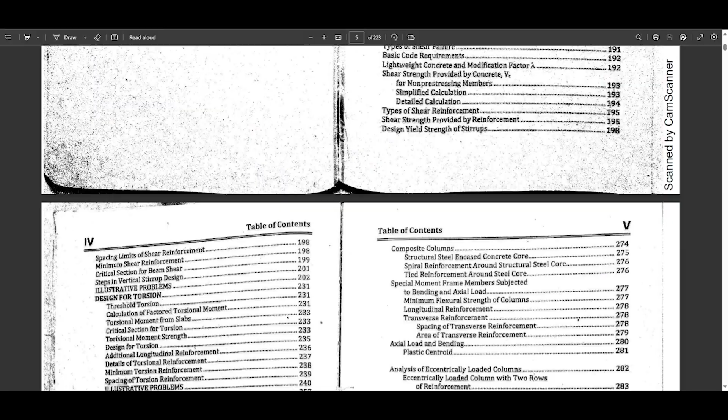Okay, good, so let's read it one by one. So, in the solution process for designing a singly reinforced concrete beam, please refer to our book. This is a simple span - very easy - a simple span beam loaded as shown. Given here is FC prime, that is actually the compressive strength of concrete, and the yield strength is 415 megapascal.

That is the yield strength of the metal. As I said, in our analysis, let's assume first that the steel yields - that's why usually what we use for the strength of the material, the tensile strength, is FY.

Kaya last time I discussed to you the grading system, di ba? Pag FY, this is grade 60 by the way. This is grade 60 kasi 415 is equivalent to 60 KSI, more or less, okay? And then there is steel cover of 60 millimeter.

So basically yung analysis, okay, of finding the dead load and giving the dead load and the live load, gagawa tayo muna ng tinatawag na procedure or steps katulad ng ginagawa natin sa steel design. Okay so the first step, pakibasa nyo nga, ikaw na nga.

Russell Allen, meron ka bang, iho? Do you have the DIT Gillesania's book? Meron kang DIT Gillesania's book? Russell? Hello?

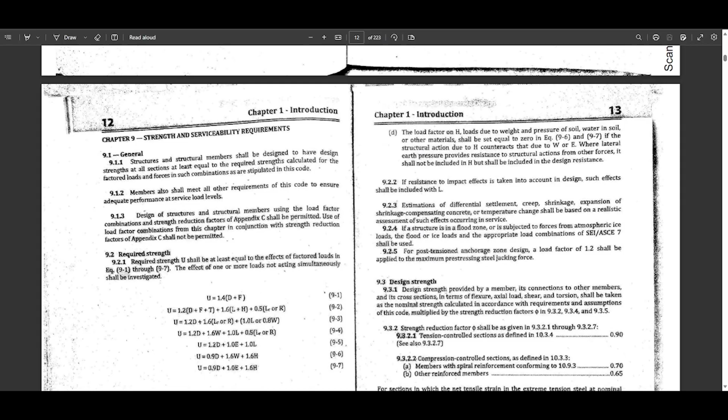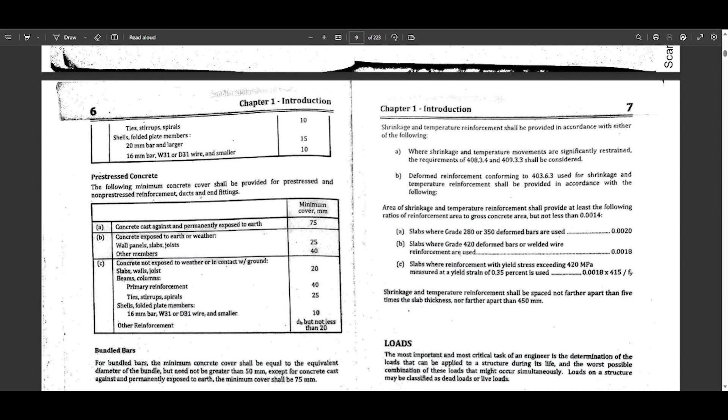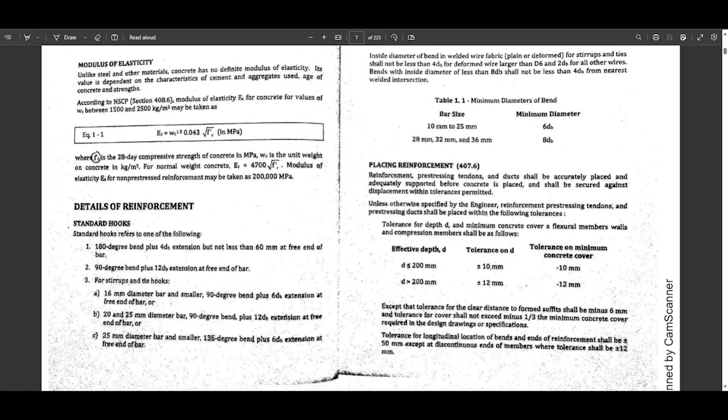Paki-check nyo nga, hanapin nyo. Have you seen, Russell? Not yet, sir. Okay, hanapin nyo, nandyan yan. Analytical steps for singly reinforced concrete beam. Sino nakahanap na? Para mabilis tayo. Hello? Sino nakahanap? Did you find it? Tingnan nyo dyan, sa initial page, in chapter 1 or 2 yata, singly reinforced concrete beam. Hello? Nakita na? By DIT Gillesania? Wala pa rin? Di pa rin nakahanap? O sige, mamaya hanapin nyo, ha?

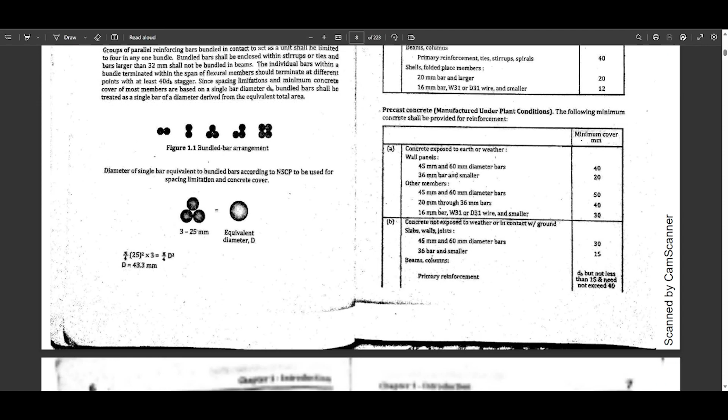Sundan nyo, ha? Okay, hanapin nyo, nandyan yan, it's all found then. So yung first step is load analysis, identifying the load. Ito, ibig sabihin, identified, ang dead load and live load.

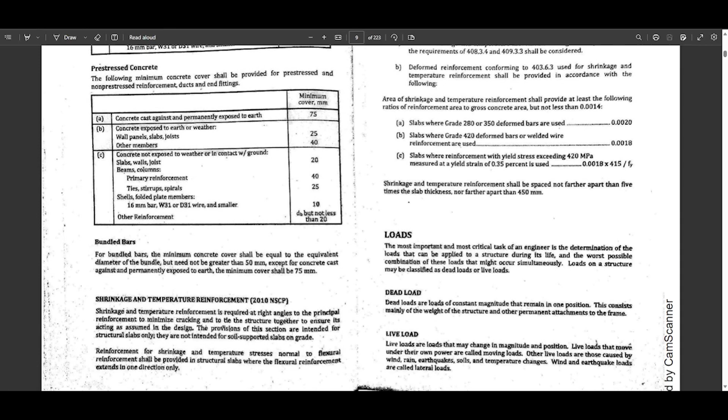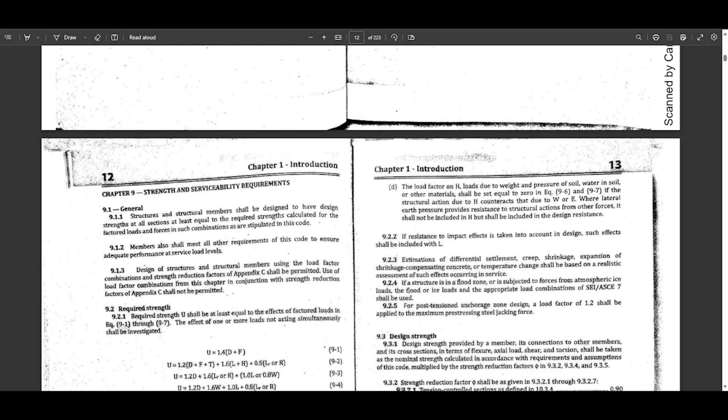Usually, lahat kasi ng klase ng dead load materials, like ano ba mga dead load materials? Floor tiles, yan. Ceiling, okay, partition, okay, they are all dead loads, including the weight of the beam and the slab. So everything here, makikita nyo yan doon sa NSCP. Nandun lahat yan in kilopascal, no? They are found in the NSCP, lahat yan in kilopascal. Ano yung ibig sabihin ng kilopascal?

That is kilonewton per meter squared, that is load per area. In general, load per area yun, ha? Hindi yan uniform load, ha? Okay? Pero ang ginagawa natin, tinatransfer natin from the floor to the beam itself para maging uniform load yan. Actually, there are formulas that we can use for us to consider load transfer.

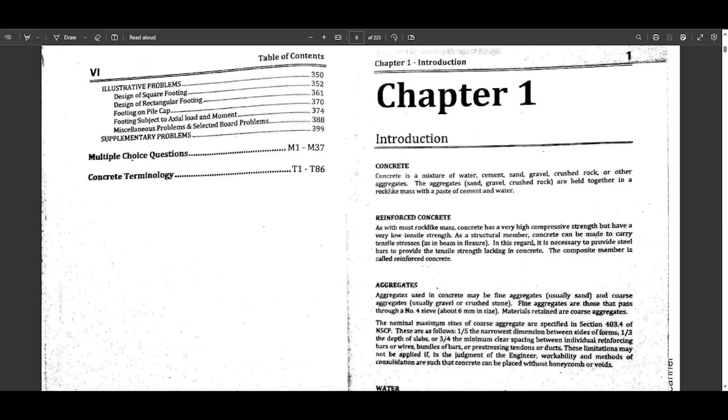And also for the live load. Sa live load naman, pag residential or type of occupancy, okay, tingnan nyo rin yung NSCP nyo, yung loading, nandun din siya. Usually, the value for the residential is 1.9, okay, or kaya 2 kilopascal. Pag commercial, school building, hospital, meron din sila correspondingly, mas mataas definitely, no? It can be more than 4 kilopascal. Ayun, hanapin nyo na lang ulit sa NSCP, ha?

So please refer to all of this matter sa NSCP when it comes to load. So therefore, dito naman sa problem natin, identified na yung load. Meron na siyang superimposed dead load na 20 kilonewton per meter at saka live load. So wala nang problema, nandito na siya, naka-impose na sa beam. Identified na. So that is the first step, identifying the load.

Okay, so dead load. Sulat ko na lang dito, ha. Huwag nyo lang copyan, I will send it to you later on, ha. So dead load is 20, and then the live load is 10. Identifying the load, meron na.

So these are called superimposed dead load. Hindi pa kasama rito ng weight ng beam. So sabi ko nga sa inyo last time in our steel and timber, palagi natin isasama yung structural components sa dead load, ayan, yung weight niya, yung bigat niya. Okay, in the case of beam, wala, hinahanap natin yan. And ang priority natin, class, is to design consequently the beam at the middle span where maximum moment will occur, and i-design natin.

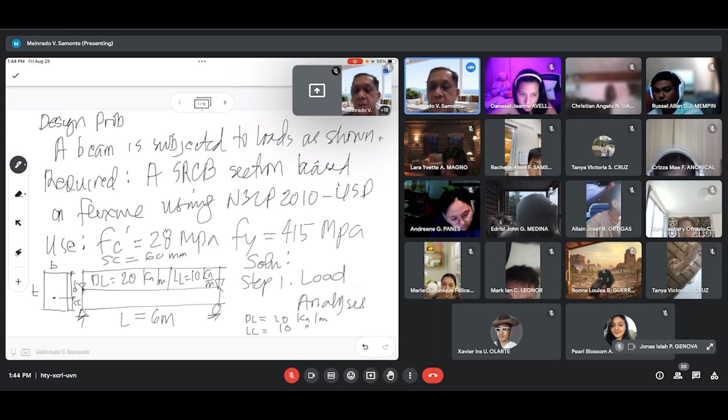Dito sa problem, it is given as 60 mm yung steel cover, class. Ibig sabihin, yan yung distance naman from the bottom fiber, okay, or extreme fiber, to the centroid sa gitna, ha? Okay, there you are.

So yun ang first priority natin, yung section. Section yun, this is the section of SRCB, yan, section of SRCB. Okay, yan ang section ang hahanapin natin, ha? Take note, ha? Okay, yun ang first priority natin pag singly reinforced. Pag nag-design tayo, yung section, hanapin mo rin yung width, tapos hanapin mo yung thickness, and including the effective depth. Una muna, basically, effective depth muna, yung D. Okay? So yun ang first priority natin, our objective in the design. Okay, so next.

Okay, also we designed the reinforcement. Yung bakal, kailangan yan. Pag walang bakal, ilalim ng bottom fiber, below the bottom fiber is under tension of the neutral axis. Technically, yung neutral axis niya mababa, so magpe-fail siya dahil kailangan natin ng reinforcement sa ilalim ng particular portion ng beam.

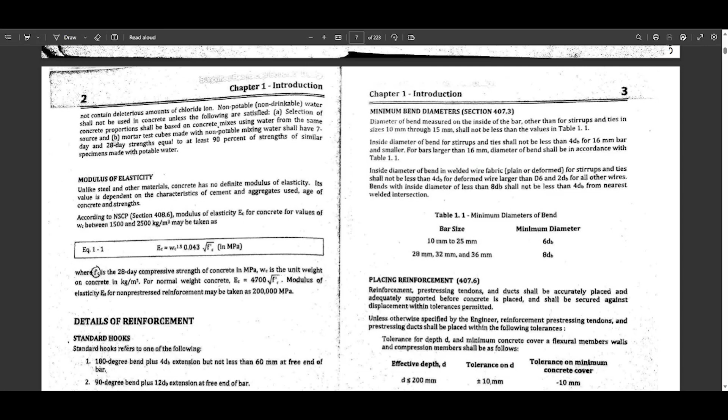Sir, ano po rin yung SC? Steel cover. Lahat ng parameters, define yan, nandiyan sa book ni DIT Gillesania, pati yung derivation, pag-aralan niyo na lang. Nandyan lahat yan, everything is there, pati yung formula for bending moment, yung ultimate capacity.

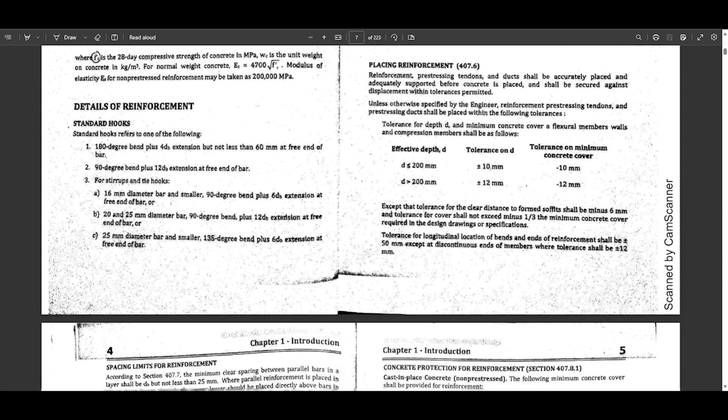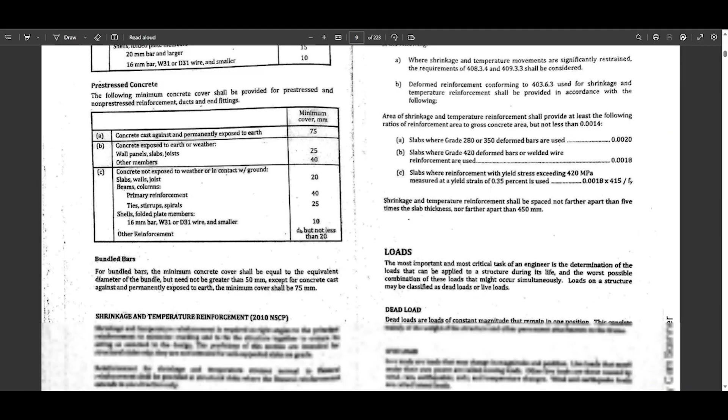Kadalasan ang hanapin natin dito, because flexural strength, ibig sabihin related to sa moment, kasi magkakaroon to ng bending moment, above tension at saka compression. Kaya importante, you study yung derivation kasi mahaba-haba yun kaya hindi ko na i-discuss. Pag-aralan niyo na lang, nandiyan yung derivation and all the parameters defined ni DIT Gillesania. But kung kailangan, itanong niyo sa akin later on, how this particular formula was determined.

Okay, so marami yan, ha? Mamaya didiscuss natin yan isa-isa. Okay, next, step 2, kailangan mag-assume tayo ng weight ng beam. Sino nakahanap na yung analytical step? Ikaw, Panes, baka nahanap mo na ano yung step 2 dyan? I know that is the weight of the beam.

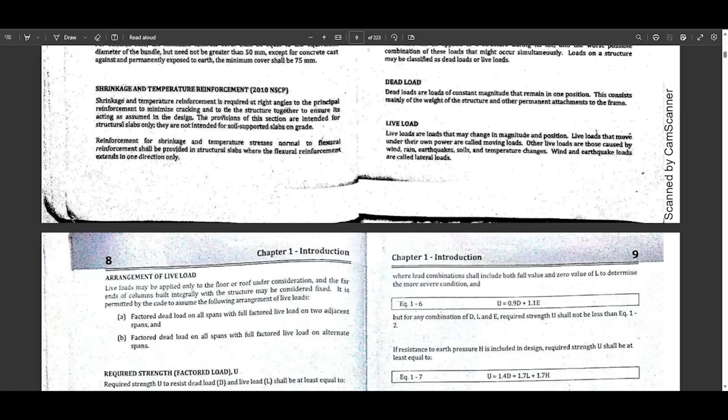Panes, paki-sabi mo nga, anong sabi niya? Sige, read. Approximate the weight of beam dead load as follows. Tatlo yan eh, tatlo yung weight ng beam as yung assumption: small beams, medium size beams, and then large size beams.

Anong inassume natin? So pwede ka rin ano yung value pag small, medium, at saka large beam. Come on, dali, go ahead. Pag small, what is the assumed weight of beam? 2 kilonewton meter po. Okay, 2 kilonewton, yan okay. Next ano pa? Pag medium, 3.5. Inassume ko 3.5, ha? Inassume ko muna siya na 3.5, okay? Kasi bakit 3.5? Kasi medyo mahaba-haba ng konti, okay.

Ideally, between 0 to 3 meters, pwede siyang small beam. 4 meters to about 6 meters, pwede siyang medium, kasi malaki na yung moment niya. And then 6 to 10 meters, large beam. More or less, yun ang pwede natin gawing basihan, or including the load, perhaps, sometimes. Kasi pag malaki din yung load, it will produce a large moment, no?

So that is the basis kaya nagbigay ng suggested beam si DIT Gillesania, to assume the weight accordingly. Kasi wala pa tayong weight, wala pang section. You cannot determine the actual weight unless they have the section. Maliwanag yun, ha? So inassume muna natin na medium size beam, so 3.5.

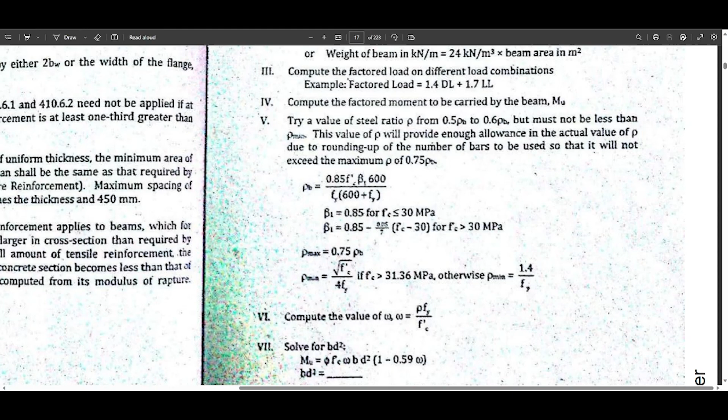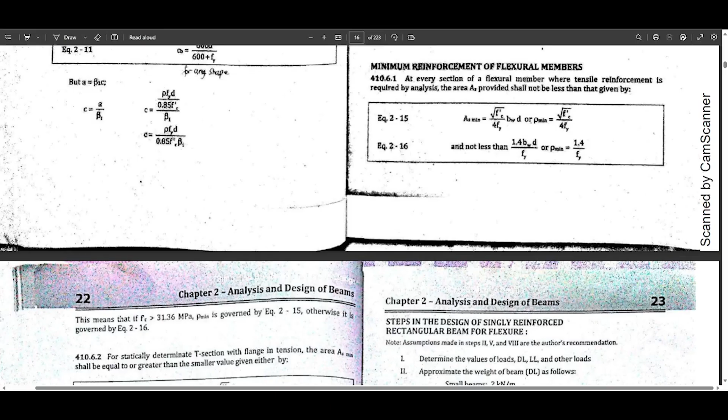Nag-re-reconnect ako, ha. I was lost with regards to my Jamboard. Biglang interruption, eh. Okay? So far, ganun lang naman idea niyan. Sandali lang, ha. Magsishare lang ako. When I come back, I will continue the discussion. Sandali lang, ha. Nagre-reconnect pa ako. I'm still reconnecting with my Jamboard. At any rate, I hope you can follow with the discussion, okay. I'm trying to get my connection. Medyo mabagal, biglang bumagal.

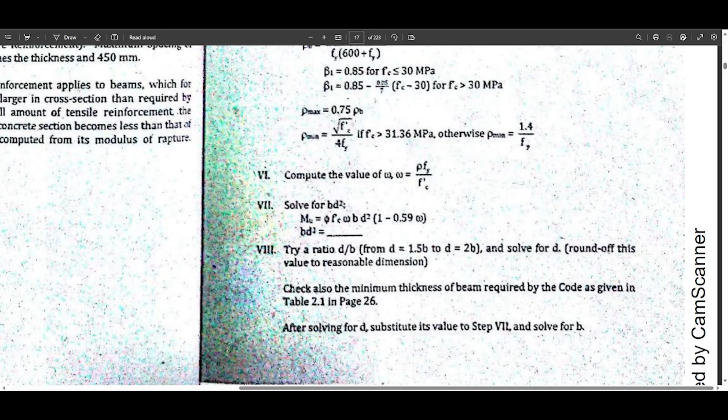Beta 1, okay, is a parameter in which it is equal to 0.85 for all f'c less than or equal to 30 megapascal. Ang value natin kasi rito sa given in the problem, ang f'c natin, yung compressive strength is 28. Kaya ang beta 1 dito must be equal to 0.85. Gamitin mong value 0.85. Beta 1 is equal to 0.85.

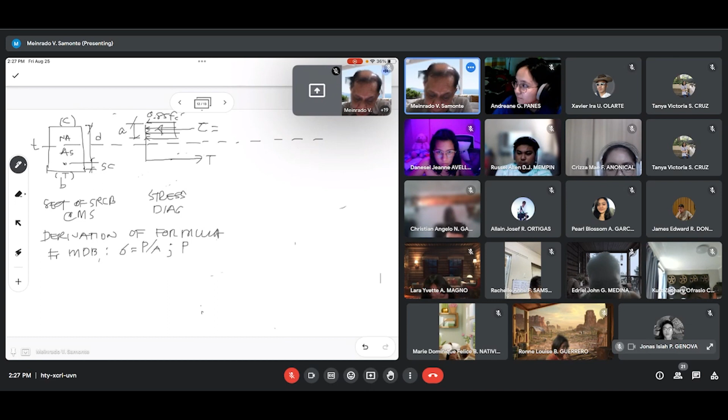Ngayon, in such a way, sinimplified pa niya. In terms of the force, it is also equal to the stress multiplied by the area. Simplification yun. Or cross multiplying the stress by the area will give you the force. Okay? So, bakit force? Kasi nga, we have two forces here, two resultant force, under compression and tension.

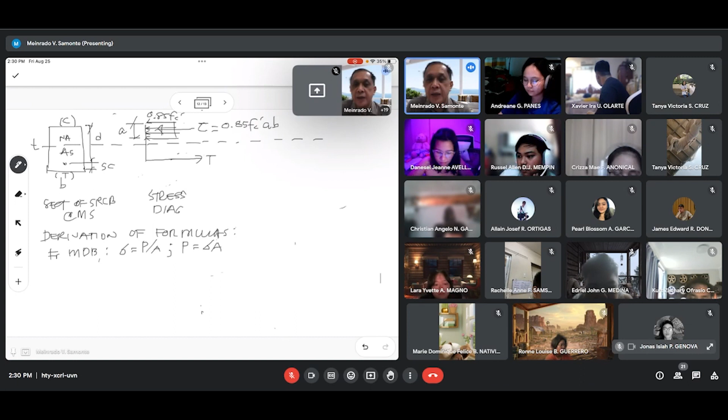It has yielded, meaning it has reached the yielding point. It has passed the proportional limit towards the ultimate strength. So the formula now, again using sigma, our sigma is Fs or Fy.

Let's use Fs for now. Okay, if you want, that is the actual tensile strength multiplied by the area, or Fs multiplied by the area. So there now exist two particular forces.

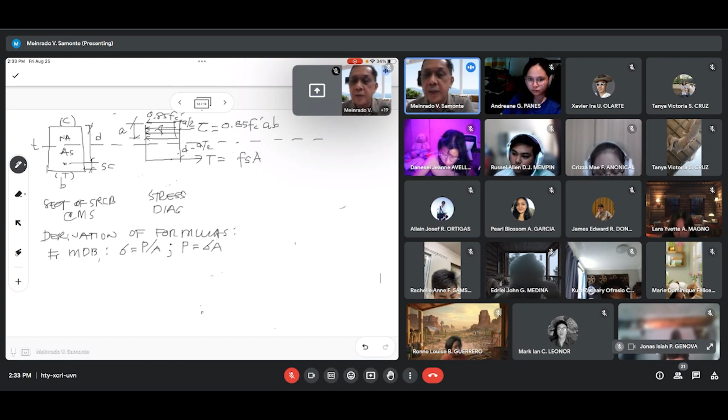So therefore, we've created these two couples. And technically, one of the failures of the beam, for flexure too, huh?

Flexural strength or flexure. This is the formula we're deriving. When it's flexure, it means this will consider bending moment, because flexure is bending. So this will have a moment here. That will now be your moment.

It will produce a certain moment. Let's call it Mn. So actually Mn later on is the nominal moment we used in LRFD. What is that moment? Actually that is the couple. We said in statics that a couple is the product of the force by the lever arm distance.

Very easy, okay? If you remember couple, C is equal to F multiplied by D. What is F? Either compression or tension, that is the force, either F, or either C or T. Depending, for example, if I take moment about T, we get the moment due to compression.

So what now is the moment due to compression? Let's place it, okay, based on statics now, from statics. Okay, so statics, from Singer, says couple is equal to the product of the force multiplied by the distance. That's the formula, okay, from statics, that's a couple.

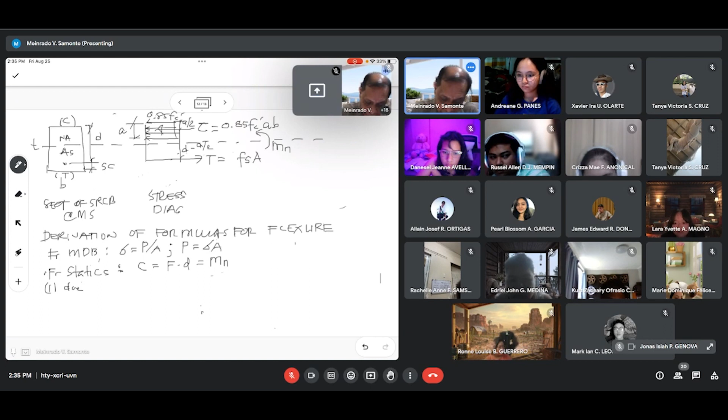At compression, due to compression. Significantly, if you take moment along the tension zone equal to 0, then the nominal moment due to compression shall be equal to the product of the force.

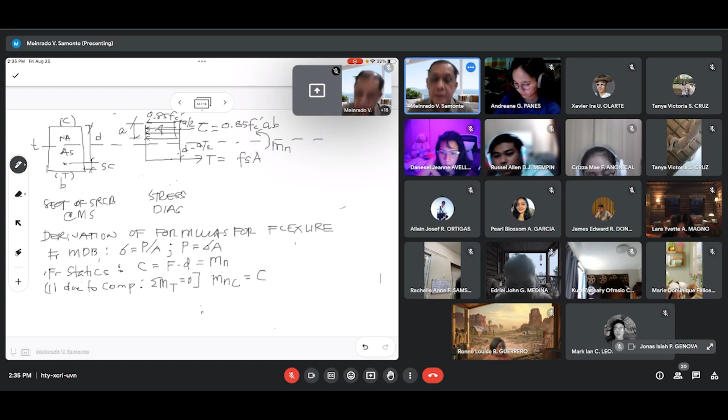What is your force? That is your force C, isn't it? This is statics, the compression force C. And then multiply it by the lever arm distance.

What is our lever arm distance? That will be the distance between the two forces, D minus A over 2. Okay, very easy, right?

Using statics by taking moment, you take moment at the bottom. There are two of them. You take moment at the bottom to compute the moment due to compression. So if you substitute C now, what is the value of C?

We can state that moment due to compression shall be equal to 0.85 FC prime, multiplied by AB, then multiplied by quantity D minus A over 2. This will now give us the first equation, equation 1-A.

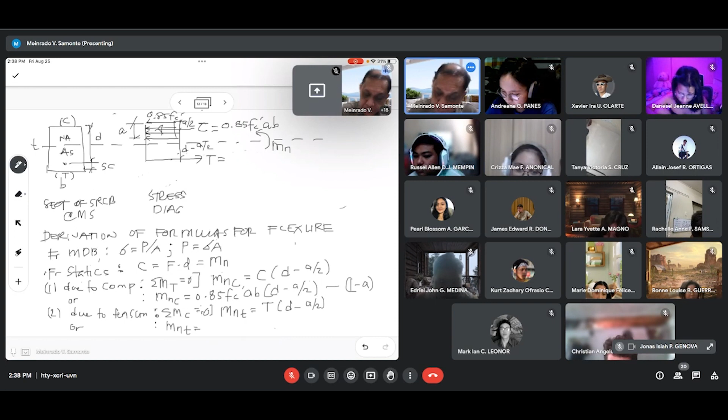Let's put AS first, since that usually comes first, though it doesn't matter which order. AS FS, then multiply it by quantity D minus A over 2. This will now be our equation 2-A.

Any questions? So that's the formula, very easy for us to determine the bending moment based on statics. That's the basic assumption.

Now, later I'll give you the formula on how to check whether steel yields or not, based on the strain diagram. So what is a strain diagram? Literally, we'll have a strain diagram here such that we have two particular strains. What is strain? That is elongation.

That is what we call elongation, in which there is elongation due to steel and elongation due to concrete. For the elongation of concrete, theoretically, that is 0.003, and then the distance, this is the distance I'm talking about, this is now your distance C from the neutral axis.

The remaining distance, at the point of zero strain, this one is taken as D minus C distance.

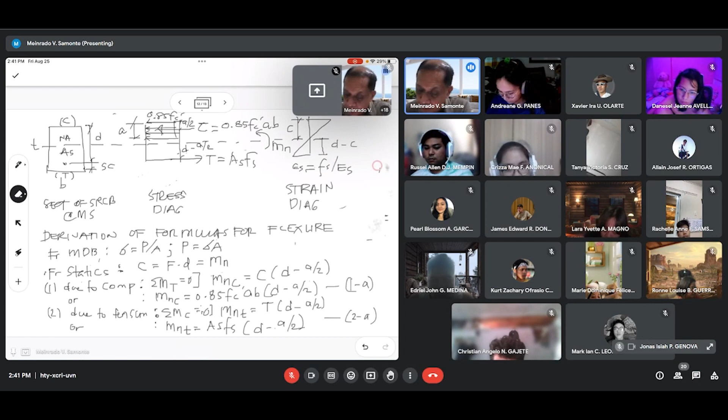Because the problem here is, if it doesn't yield and is less than Fy, use Fs. But if it yields, use Fy. This is called the strain diagram. At the top, the concrete, its strain is fixed at 0.003. Epsilon of C is 0.003.

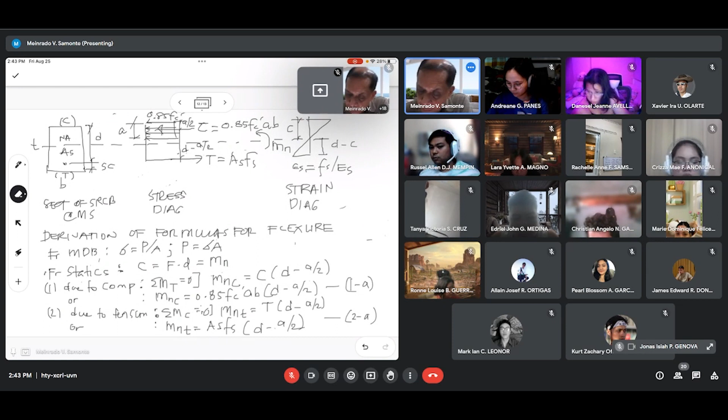Okay, basta yung nasa taas, epsilon of C yun, ha? That is epsilon of C. Masyado kasing na-usog doon and I cannot write down. So, epsilon of C to. This one is epsilon of C. We call this as the epsilon of C.

Sa concrete sa taas, under compression is concrete. Sa baba is steel, yung elongation niya. And the value given by the code, ACI code, is 0.003. Huwag niyo na akong tanungin bakit 0.003 yan. Okay, so na-modify pa itong mga formula nito.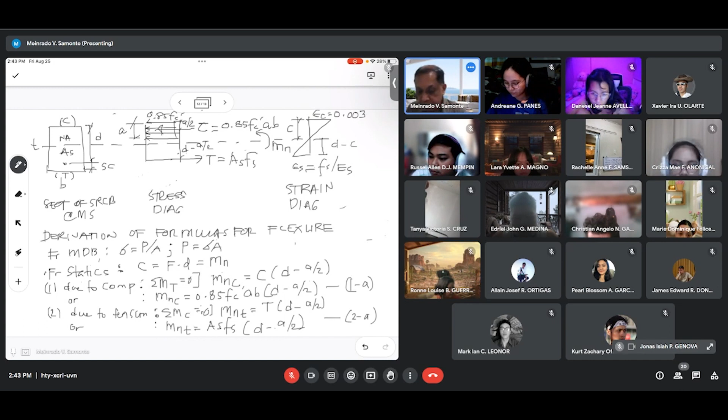So technically, from ultimate strength or MU capacity of the beam, moment capacity, ultimate moment capacity of the beam now, from LRFD and USD, ultimate moment capacity na. MU capacity, MU must be equal to phi of MN, where sa LRFD, MU is the ultimate moment capacity of the beam in kilonewton meter, while Mn is the nominal.

Magkaiba yun, class, nominal at saka ultimate. Nominal naman, Mn is the nominal moment capacity of the beam, of the non-pre-stress beam. Ang tawag nila dyan, non-pre-stress beam. Hindi ko na lang nilagay, tingnan niyo doon sa libro ni Gillesania. And phi is the reduction factor, which is equal to 0.9. Reduction factor for flexure or bending, and it is equal to 0.9.

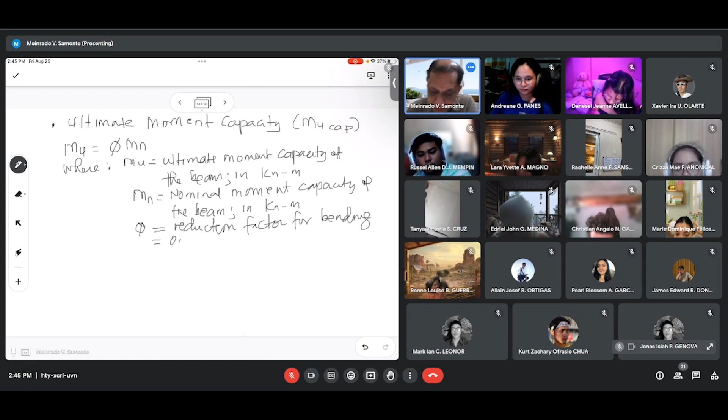Okay, pag alam mo si Mn, substitute mo lang yung phi, you can determine Mu. Okay, tawagin natin itong equation 2, this one will be a second equation. Now, mayroon pang modified formula. Maraming formula si A class, hindi ko na i-discuss, mahaba eh. Marami yan, 4 yan, yung formula na binigay ni NSCP.

Modified formulas, okay. For MU, MNC, nominal moment capacity under compression. Ito yung modified formula, isa sa mga formula noon kanina binanggit ko, since yung A kasi, there are so many formulas. 4 yung formula ni A. Tingnan niyo na lang mamaya yung mga formula niya, derived from statics and derived from basic formula.

Ang unang formula given, A is equal to beta 1 of C. Ito yung first formula for A, tandaan niyo yan. Sinabi ko na kanina, okay, pag if FC prime is less than or equal to 30, sabi natin, use beta 1 is equal to 0.85. Ito yung gamitin, nalagpasan na.

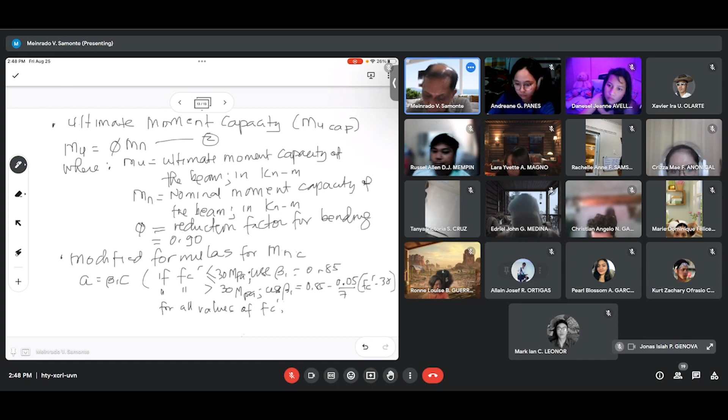Likewise, okay, if Fc prime, for all values of Fc prime, ang sabi niya, huwag ka rin daw bababa ng beta 1 must be greater than and equal to 0.65. Ayun, huwag ka rin bababa ng 0.65. Okay, there you are. So yan ang mga first formula yan for A.

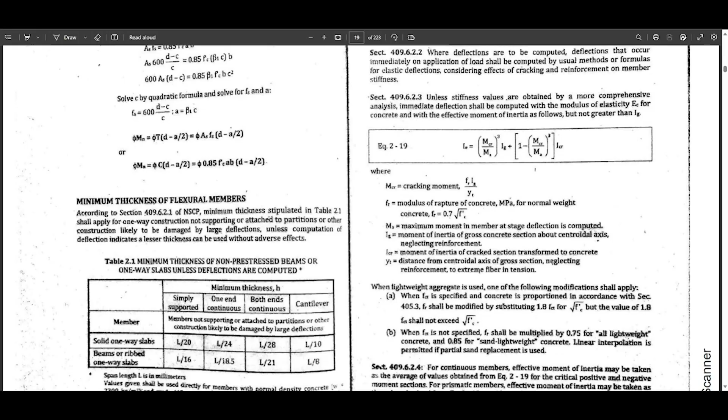Isa sa mga formula to, modified formulas for stress block parameter A. Marami pa siya, dalawa pa yung binigay niya. Pakitingnan na lang. Yung isa naman, second formula niya, if I sum up forces along the x equal to 0, T is equal to C, where that is AS, Fy shall be equal to 0.85 of Fc prime of AB.

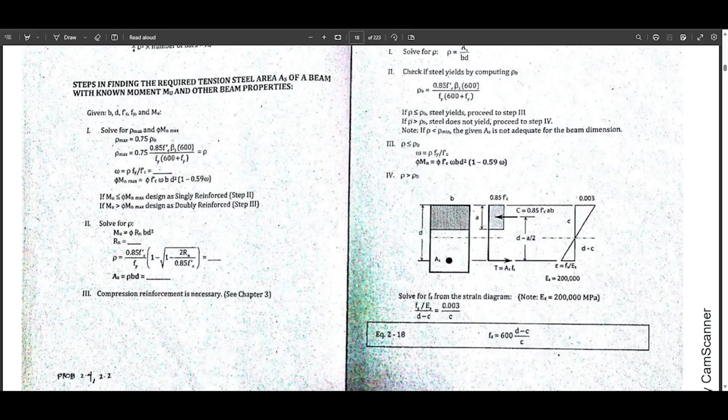Sabi niya, rho is equal to AS over BD, or AS is equal to rho BD. And then if I substitute natin ngayon to sa equation 2, so substitute AS in equation 2. So pag sinubstitute mo yan, okay, therefore A is equal to rho BD Fy over 0.85 of Fc prime of B. Na pag sinimplify mo to, B will be cancelled out.

Yan. Maka-cancel out si B, okay? So what remains now is that A, third formula, is equal to rho Fy d all over 0.85 of Fc prime. Yan. Another formula. Third formula yan. And finally, yung fourth formula niya, since omega, yung kanina ginamit natin, is equal to rho Fy over Fc prime to determine rho, okay?

Then, or perhaps, rho is equal to omega Fc prime over Fy. So, yun yung simplified naman in terms of rho, okay? Para ma-eliminate natin si rho, technically in the formula. Then, substitute again. Substitute rho in equation 3. Hence, A now will be equal to omega Fc prime over Fy, multiplied by d all over 0.85 of Fc prime.

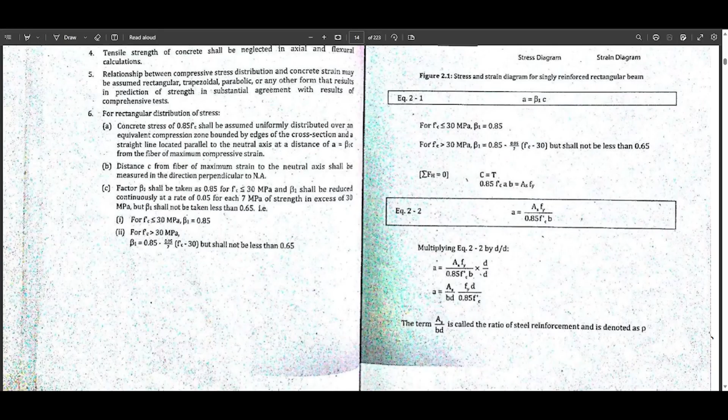Okay? So these are some of the helpful formulas that we can use to determine the stress block parameter, because this one is an unknown factor, class. Unknown parameter yan that we need to determine one by one. So apat sila. This is the first one. Okay, question? So pag alam mo na A is equal to omega d over 0.85, what is the modified formula? Ito yung modified formula niya ngayon for finding your Mu.

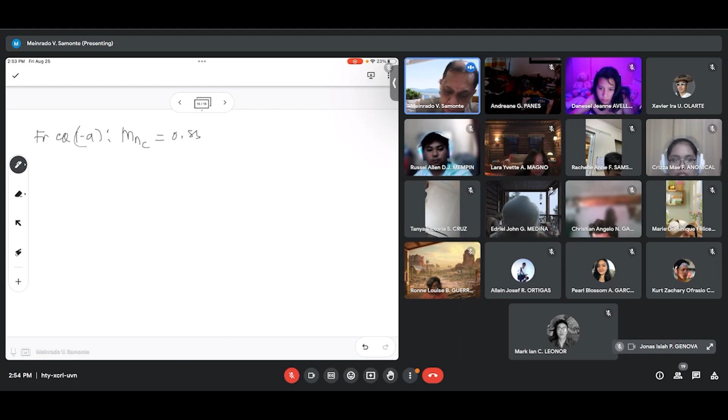Okay, so since Mn under compression ngayon, ang modified formula will be, from equation 1-A, yung unang derived formula for nominal moment capacity, Mnc is equal to 0.85 of Fc prime of a, b, multiplied by quantity d minus a over 2. Ayun. Di ba? Ito yung formula kanina.

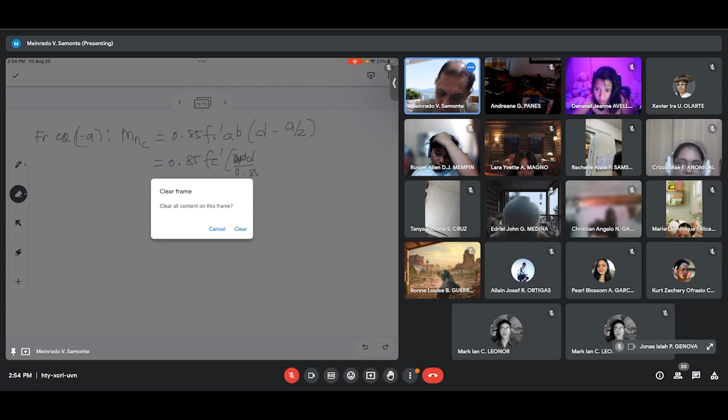Yung moment. So, pag ni-replace ko ngayon ng a in terms of omega, that will now be 0.85 of Fc prime of omega d all over 0.85. Sino yun? Pumapasok. So we have omega d over 0.85, and then multiply it by b, and then multiply it by quantity d minus a over 2, which is omega d over 0.85 divided by 2.

So technically, magka-cancel out ngayon yung 0.85. Itong dito naman, if you try to factor out yung d and simplify it, therefore, Mnc, the nominal moment capacity under compression, will be Fc prime b d squared omega multiplied by quantity 1 minus 0.59 omega. This is now the alternative formula for the moment capacity under compression. Tawagin natin to equation 1-A prime. Either that one or this one will do. Maliwanag? Ganun lang kadali.

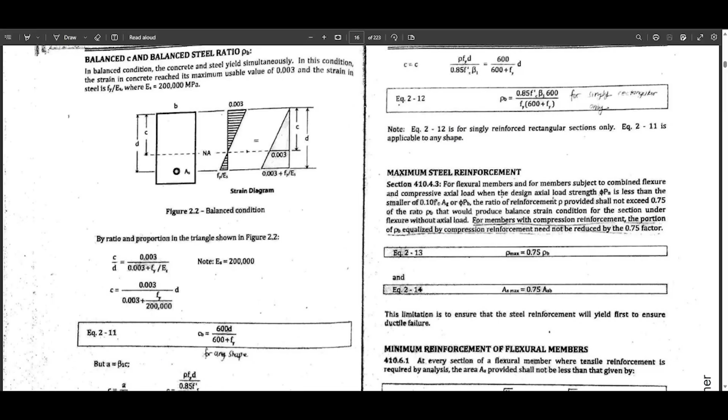Solve for B. Tama po ba? BD squared. Okay, solve for BD squared. Thank you, tama. Solve for BD squared. How do we solve for BD squared? Yan. Kanina, yun nga, dinerive ko na kanina yung formula for omega. Kasi pag hindi ko dinerive yun, hindi nyo malalaman yung formula na yun, no? The alternative formula based from statics.

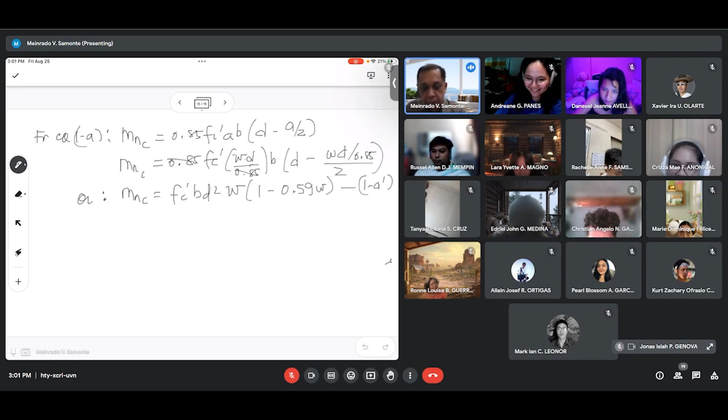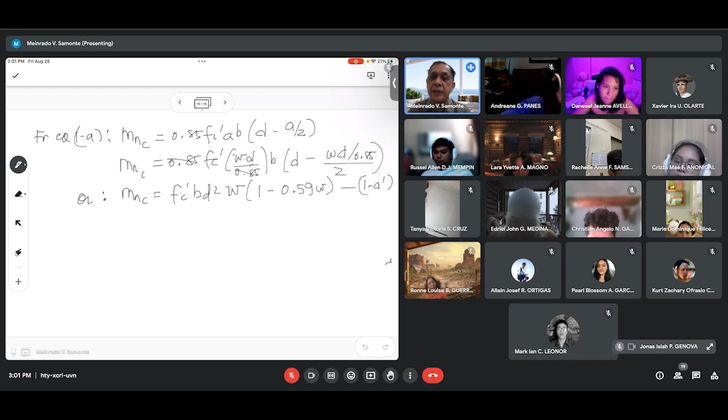Okay? So, how can we design now the section? So, ito lang gamitin natin. In-apply natin yung principle na under this condition, nagdi-design tayo, gamitin mo muna yung MU max. Kasi yung MU max is the maximum supplied moment. Okay? Magkaiba yan sa MU capacity. Wala pa tayong MU capacity dahil wala pa naman tayong section. So technically, kaya nga natin yung design, gamitin mo muna yung supplied moment, yung maximum. Okay? Therefore, pag ginamit natin yung MU max in the design, ayan ha.

Okay. Ayan. So, ginamit natin that MU capacity is phi MN. Don't forget yung phi, ha? Pag MU yung pinag-uusapan, ha? Kailangan may reduction factor, 0.9 yun. And then, it must be greater than or equal daw to MU max for design purposes. In investigation, to make sure na safe siya. Pag nag-investigate naman tayo, dapat yung MU capacity, huwag kang bababa ng MU max due to supplied load. Okay?

Ngayon, yung MU max kanina, that is due to supply, na-compute naman natin, 198.9. Tama? Okay. I hope that is correct, no? And then 10 to the 6. Bakit 10 to the 6? Kasi kilonewton meter yan. So conversion factor para maging newton millimeter, you have to multiply it by 1 million. Kasi 1 kilonewton is 1,000 newton, then 1 meter is 1,000 millimeter. Kaya 10 to the 6. You just add the 2. Okay? And it must be equal lang to phi.

O anong phi natin? 0.9. And then FC prime is 28. Tapos yung unknown variable na BD squared. Okay? Multiplied by omega 0.2134 by quantity 1 minus 0.59 of 0.2134. So the resulting value, again, ito yung ginamit natin ulit sa steel, in our previous steel design. Sabi ko, when you round up numbers, unit tapos 6 decimal places. Tandaan nyo ha, unit 6 decimal places times 10 to the n. O ano ang n natin? Lumabas sa solution, paki-multiply nyo lang, okay?

Whereas, note ko rito, if WB actual is greater than the weight of beam assumed, then go back to step 3. Balik ka sa step 3. Ano yung step 3? Why step 3? Bakit ka babalik doon? Kasi i-adjust mo ngayon yung ultimate load. Babaguhin mo yung ultimate load. Hindi na siya 3.5, maaring mas malaki dyan.

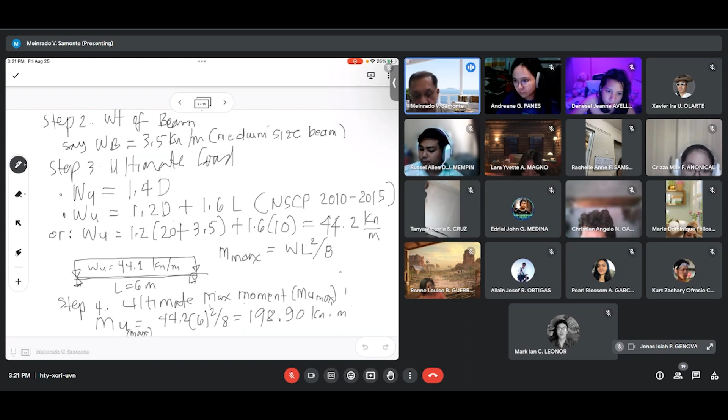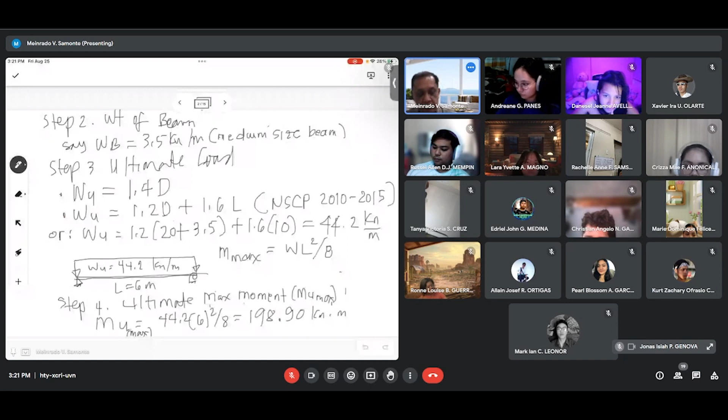Ibig sabihin, hindi kakayanin nung WU mo yung maximum moment. So, yun ang ibig sabihin, for checking purposes. Maliwanag yun? So, you have to go back to step 3. I-compute mo yung ultimate load and then compute also the ultimate moment, from which yan na ngayon yung basis mo for finding again your BD.

Now, step 5 and 6, neglect mo na kasi constant naman yan. Hindi naman siya related doon. So, go back to step 3, 4, and 7 to recompute your BD squared. Lalaki ulit yung section. Okay? Lagay ko 3, 4, and 7. So, yun ang arrangement niya: 3, 4, and 7.

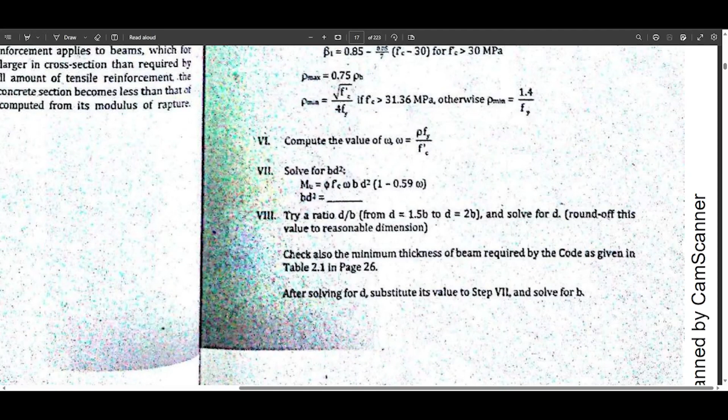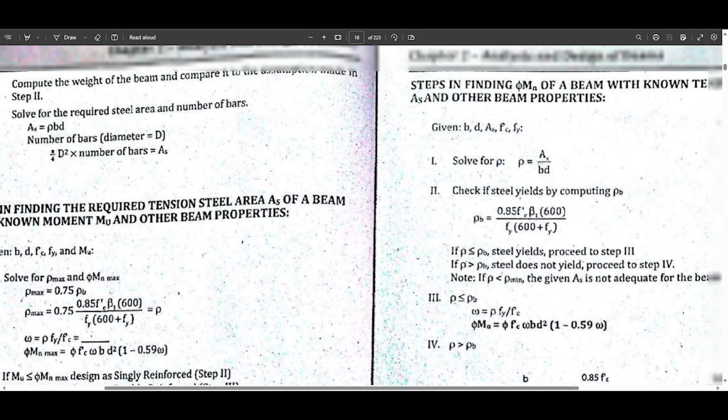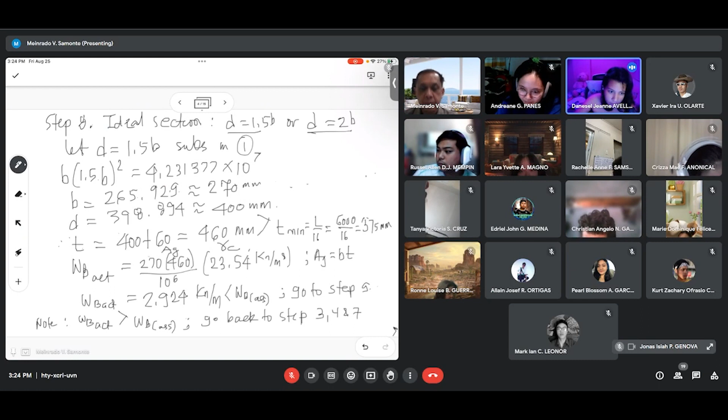Please buy a book, everyone. Have a copy of the book. Step 9 po. Yeah, step 9. Go ahead. Step 9, solve for the required steel area and number of bars. Yan, okay. Steel area and reinforcement. Ito na yung final procedure actually, no? This is the last step. Okay, we are going to now consider designing the reinforcement. O, how do we design?

Kanina, meron tayong formula. Yung mahabang formula natin na dinerive, no? Sabi natin, Mn is equal to As fs multiplied by quantity d minus a over 2. Pwede yun, gamitin natin. No problem. Pero may formula pa. Use As required is equal to... PBD po. Hindi P, rho, Greek alphabet. Rho b d. It's not P, it is rho, Greek alphabet, or steel ratio. Rho b d, correct. So gamitin daw ulit natin yung steel ratio formula to determine the required.

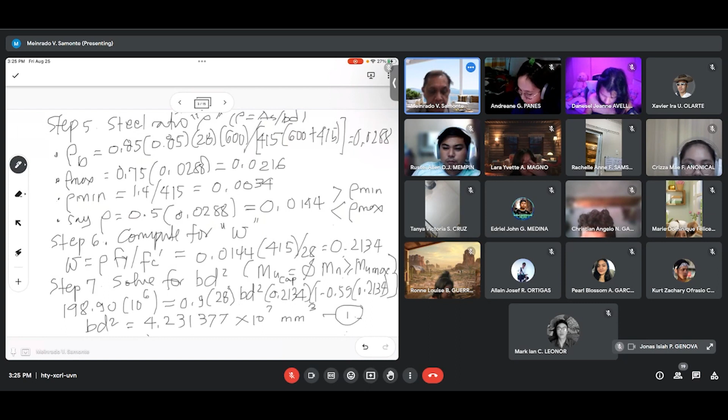Ang steel ratio natin from step number 5 is 0.0144. Check natin ulit. Yun, tama. From step 5, 0.0144. Okay? Based on assumed value of 50 to 60% of rho b. Tapos yung b ngayon, 270, and then yung d naman is 400. 270 by 400. So the result, meron na tayong area, 1,555.2. Paki-double check lang kung tama. Ayan, tapos na tayo. Nakapag-design na tayo, finally. We were able to design now.